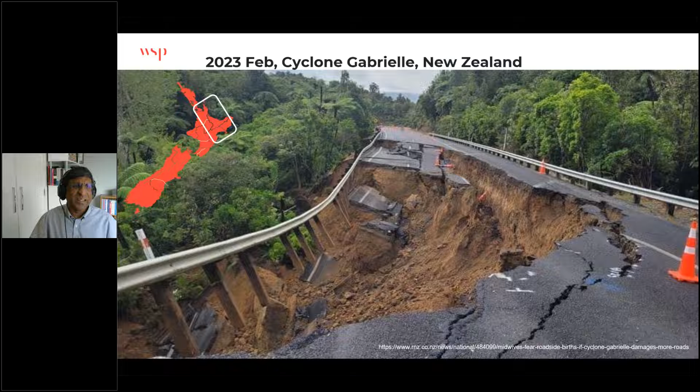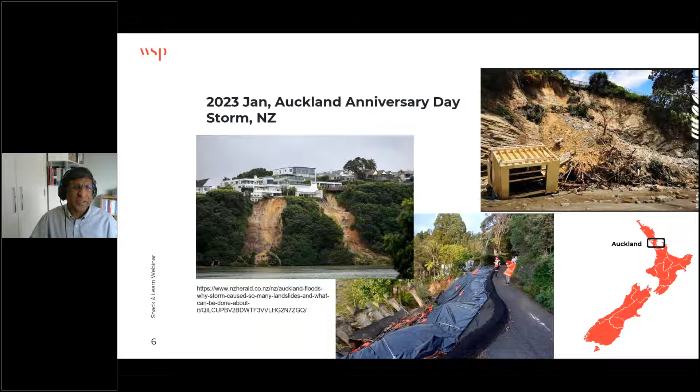So natural hazard impacts. Just this year, in February, we had a large cyclone, Gabrielle, which hit the northeast part of New Zealand, and you can see it there on the left-hand side. It caused a lot of damage to our infrastructure and suffering for our communities. Just a week earlier, in late January, on Auckland Anniversary Day, a big storm hit Auckland, which is our biggest city in New Zealand. Again, that caused a lot of damage to properties, grief for people, and affected our infrastructure. And we are still recovering from these events.

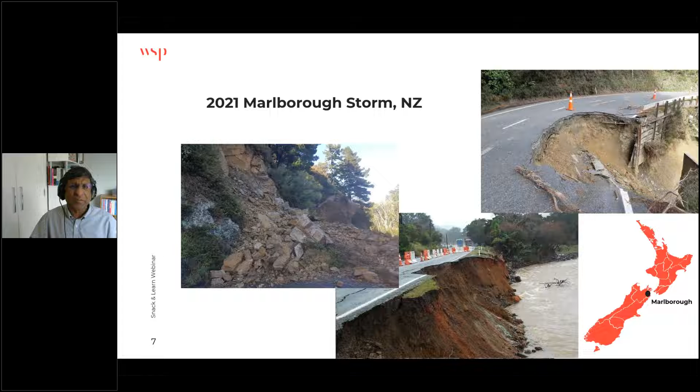And the biggest damage and destruction came from the 2010-2011 Canterbury earthquake sequence. That hit Christchurch on the east coast of the South Island, which is the main city in the South Island. One of the defining things of that earthquake was the amount of liquefaction, lateral spreading, and damage. As you can see in this picture, some new suburbs were completely damaged by these liquefaction events. And you can see the infrastructure was also damaged.

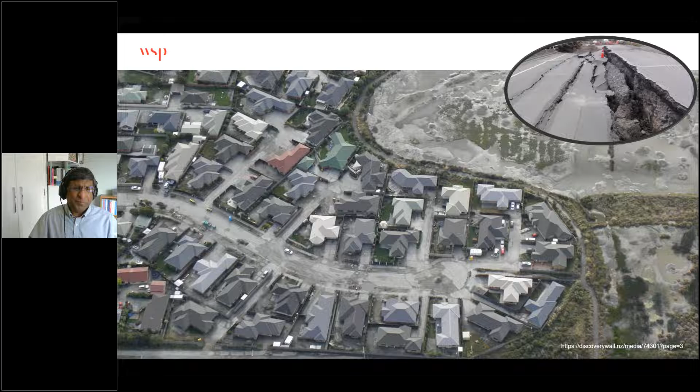Let's now reflect a little bit on climate change. So this is a piece of research done in Europe, looking at the changes in rainfall intensity between 1951 and 2013. A lot of times with climate change, people talk about the increases in temperature and rainfall, and often they talk about the averages. But what that research found is that, yes, there is an increase in the averages, but more importantly, there was a much higher increase in rainfall in the extreme events, say like the 1% severe events or even smaller than that. So this increase in severity of events is very significant.

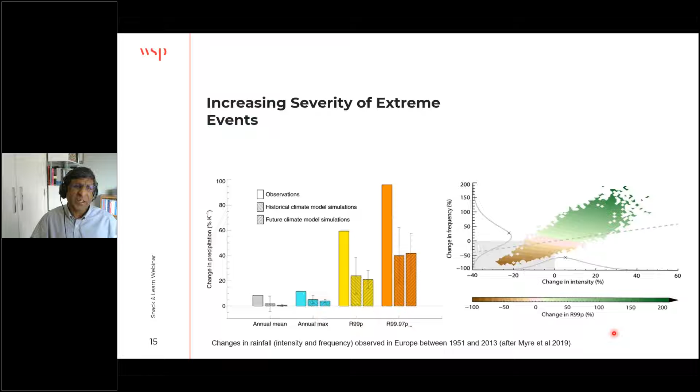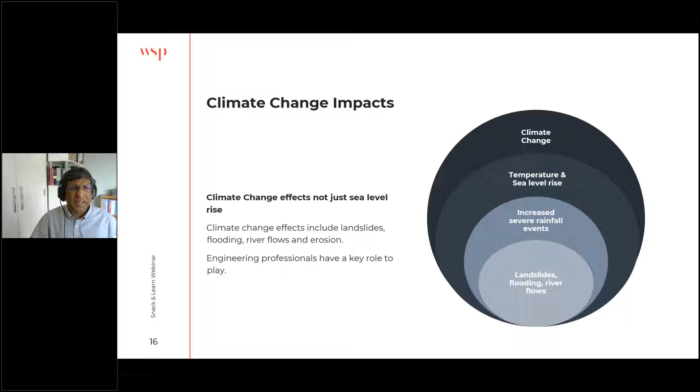And on the right-hand side, you can see this graph indicating that not only is the severity increasing, but the frequency of these severe events is increasing. So that's a key thing we need to keep in mind in our work. So often with climate change, people reflect on sea level rise. The sea level rise happens gradually, but we are already seeing this increased severe rainfall events, storm events leading to landslides, flooding, and river flows, which we as engineering professionals have a key role to play to manage them. So these climate change impacts lead to disrupted communities, large economic losses, the impact on the resilience of our infrastructure, and a large carbon footprint for repeated reconstruction and recovery.

So let's look a little bit about resilience and sustainability and what we mean by that. So living in an era of uncertainty, we need to engineer through extreme earthquake events. Here in New Zealand, we had the new National Seismic Hazard Model published just late last year, which significantly raised the risk from earthquakes. Our knowledge of that risk is now much higher. We also had extreme weather events, as we saw at the beginning, and we need to decarbonize what we do in our sector to reduce emissions and arrest future changes in climate.

So in this engineering, we also need to deal with the fact that increasingly people want to develop hazard-prone land. So how do we manage that through appropriate measures? And while doing all this, we also need to be cognizant of the inflationary era we have, where the cost of engineering work is escalating quite significantly.

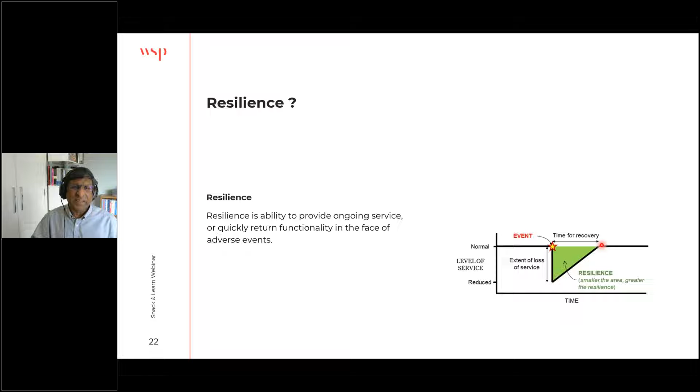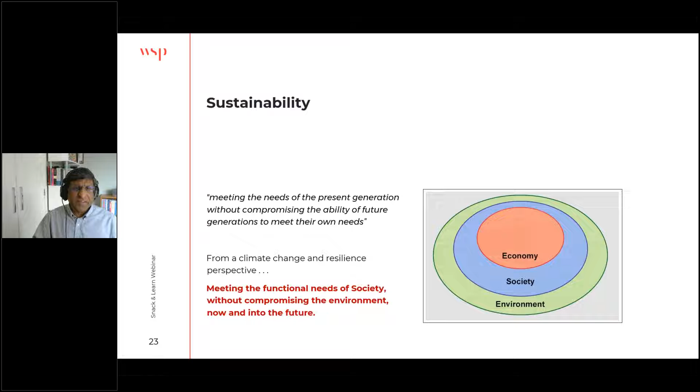So from a sustainability perspective, people often define sustainability as being able to meet the needs of the present generation without compromising the ability of future generations to meet their own needs. So we can reframe that from a climate change and resilience perspective to say meeting the functional needs of society without compromising the environment now and into the future. And you can see the economic, the society and environment are all interrelated. So eventually society is at the heart of everything we do.

So communities need to be able to sustain and thrive in the face of these hazards so that we can have resilient communities. To have resilient communities, we need to ensure the functionality of the built environment, because everything we do in engineering, whether it's a house or an office block or infrastructure like roads or water, everything is to provide a functionality for our communities. To ensure that, we need to make sure that we take into account the resilience of our built environment. And when we design, we need to design keeping in mind resilience is critical to our built environment.

Our current design approaches were developed in places and in stable environments in the years gone by. We are now, particularly in New Zealand, living in shaky isles, so we don't have a stable environment, but also we have climate change and all the uncertainty which we need to deal with. So let's look at how we can deal with this through some case studies. So I'm going to talk through 4 case studies, starting from simple ones to more impactful ones.

So the first case study is a shared path, a cycle and walking path between Ngauranga and Petone along the Wellington harbour front. And one of the key objectives there is to reduce the reliance on vehicles, cars, and therefore reduce greenhouse emissions. So one of the key objectives for this is the resilience to natural hazards and being able to cope with future sea level rise, being next to the sea. So I was engaged at WSP to provide advice on design to enhance resilience and prepare expert evidence on resilience for the Environmental Protection Authority so we can get approval for the project. So I was engaged by the client, New Zealand Transport Agency, or Waka Kotahi as we call it.

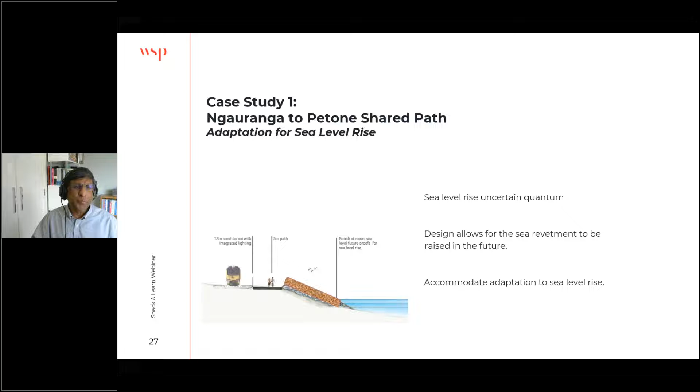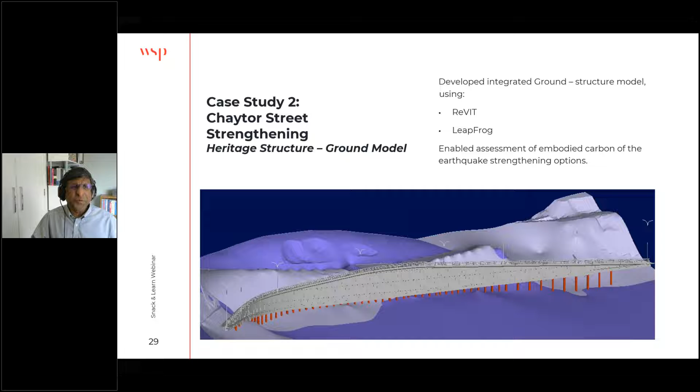So how did we go about it? We started off developing an integrated ground structure model from investigations we did. We did a Revit model to develop the structure and a Leapfrog 3-dimensional ground model to get a model of the ground. And we integrated them to get an integrated model, which we could use to look at the strengthening options of this heritage structure, but also look at the embodied carbon.

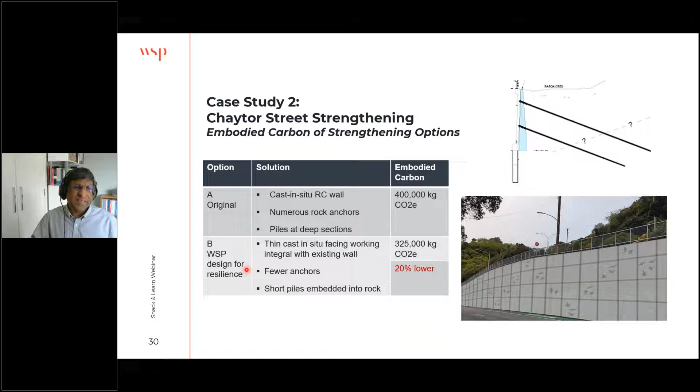So the initial original concept was to have a cast in situ wall in front with numerous rock anchors and piles at some of the deep sections only. And that had an embodied carbon of about 400,000 kilograms. So through our refinement, we were able to use a thinner cast in situ concrete slab, working integral with the existing wall, with fewer anchors, but short piles embedded into rocks. So we had good soil structure interaction. So that meant that we were able to get better resilience and 20% lesser embodied carbon.

So we used a resilience-based design so that we built ductility into the system and into the anchors so it can perform better. And we achieved a significant 20% reduction in embodied carbon and used smart digital engineering to help with the design and help with future asset management.

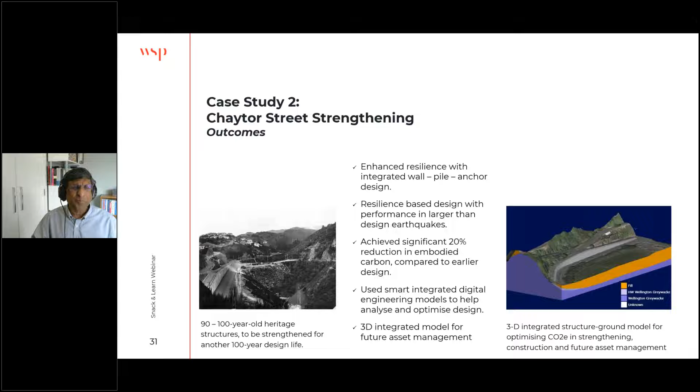The third case study is of the Ferrymead Bridge in Christchurch. So Christchurch is located on the east coast of the South Island, which is the biggest city in the South Island. And this bridge provides access to the eastern suburbs of Christchurch across a river estuary in that area. So earlier there was a 3-span bridge which was damaged beyond repair due to the liquefaction and lateral spreading of the riverbanks in the

2010-2011 Canterbury earthquakes. So the client wanted this to be a first showcase project to demonstrate that we can design for resilience and make Christchurch a more resilient city. So that was the challenge set to us when we were engaged to develop and design a new resilient bridge, and develop specifications, drawings, and contract documents, and also manage the construction in an active seismic environment. So the client was the Christchurch City Council.

So the key challenges we had is highly liquefiable soil. In fact, it had liquefied, so there's no uncertainty there. Severely damaged bridge and new piers that were under construction for the bridge. We had a very variable volcanic pyroclastic flow basement, so there were challenging foundation conditions even below the liquefiable deposits, and numerous underground services in the approaches which we had to deal with in the reconstruction. And also, as I mentioned, we were working in an active seismic environment with aftershocks, so we needed to make sure that it was able to be insured during construction, so we don't get setbacks during the process. And as I mentioned, there was a high societal expectation for completion of this early with good resilience.

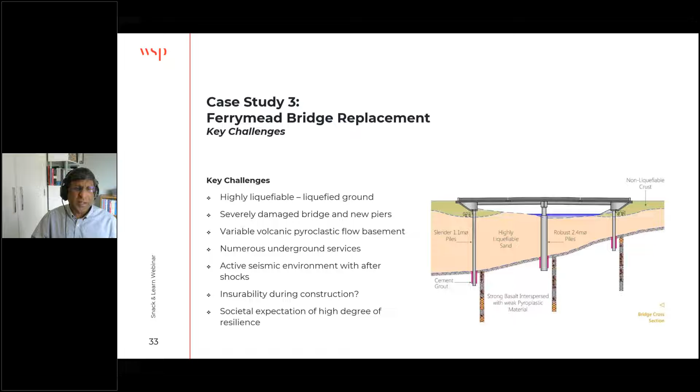So, the existing bridge got damaged due to the piers located at the bottom of the river banks. So we decided to have a two-span bridge. So we located the pier in the middle of the river, where it is not prone to so much lateral spreading loads from the riverbank. And then for the abutment piles, we used slender piles. You might think we got big loads, so why are we using slender piles? Because if you use bigger piles, we'll get bigger loads when you have lateral spreading. So we used slender piles so that the liquefied ground can flow around it, and we take a lot of the lateral load through the robust middle pier.

And then we had short land spans at either end. They act like a fuse. So if you had lateral spreading, you might get some damage to that land span, which you can quickly span over with a steel girder or steel plates, and then repair that quickly to get access. So you can see how we are focusing on not just the functionality, but also the ability to recover quickly. And finally, you might wonder, how do we deal with the foundations? So what we used is a technique called post-grouting using tube-a-manchette techniques so that we could enhance the lateral capacity of these piles in these variable deposits.

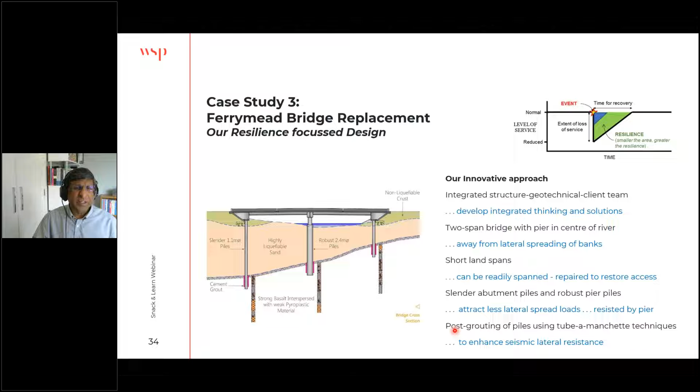So the outcome was a high degree of resilience through this resilience-focused design approach. The piles were supported during construction to prevent damage during aftershocks. And we had reduced cost due to lesser foundations and also the avoidance of ground improvement, which also meant we didn't have to disrupt all the services. And as a result, we also ended up with less embodied carbon because we had less structure in the piers and slender abutment piles, and we avoided the energy-intensive ground improvement. And that led to a successful opening of the resilient bridge. And in the process of this $30-odd million project, we were able to save several million dollars.

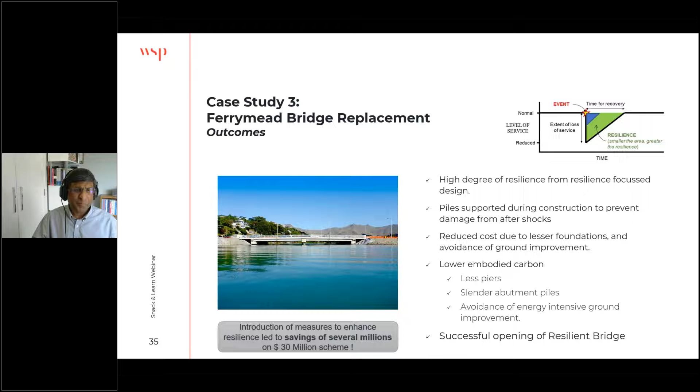So the final case study is about Transmission Gully. Transmission Gully is a major expressway north of Wellington here. It runs through quite rugged terrain with an active fault. The previous concept was very costly, and we needed to gain the buy-in of a large number of stakeholders because it was a regional project crossing a lot of territorial boundaries.

We were engaged to develop a new expressway scheme that is affordable, estimate the cost and prepare a business case for approval, and then also provide evidence to the Board of Inquiry. In my case, I had to present evidence on geotechnical engineering and resilience to natural hazards. The client was the New Zealand Transport Agency, Waka Kotahi.

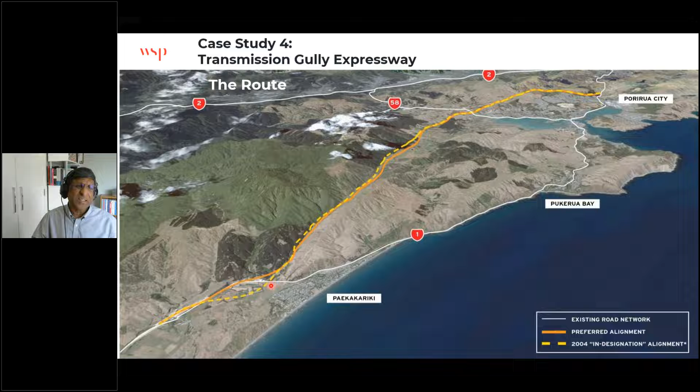This shows a bird's eye view of the project. The original highway, State Highway 1, went through there. The white line went along the coastline with very steep cliffs and the sea on the other side. So there was no opportunity to expand and it had very poor resilience. The alternative was to build this Transmission Gully route to relieve congestion.

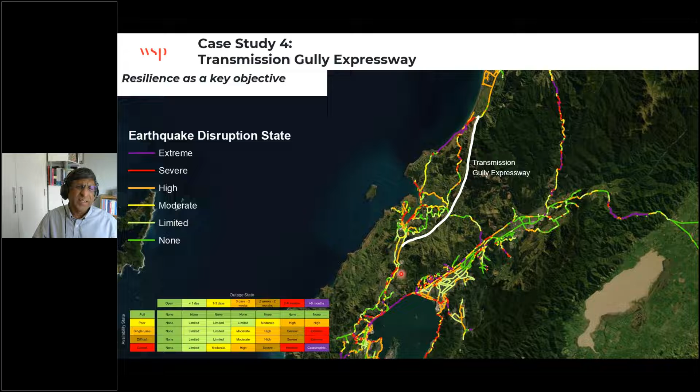So when I looked at starting this project, Transmission Gully had the opportunity to provide significant improvement of resilience of access into Wellington. So we as an organization promoted resilience as a key objective on the project. This is the first time it became a key objective on a major transport project, and this enabled us to bring integrated focus on resilience with our team.

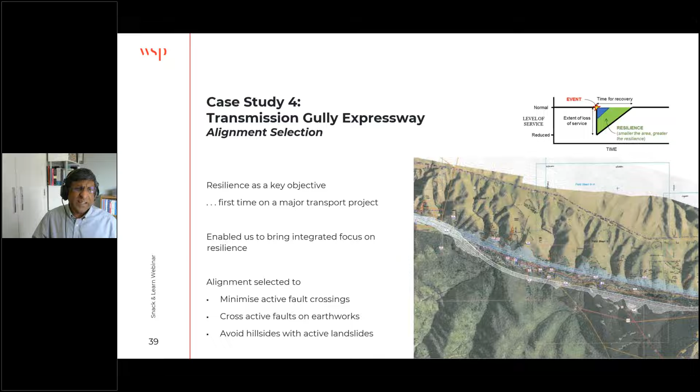One of the key improvements was to cross this active fault on a gravel fill embankment instead of viaducts. Why? Because if a viaduct or bridge crosses a fault, that kind of displacement can't be tolerated, and therefore the bridge would be non-functional, and it will take a very long time to design and replace the bridge. Whereas if you had an embankment, we could quickly use some earth-moving machinery to ramp across the fault rupture and restore quick access, and then repair that quickly as well. So we went with a more nature-based solution.

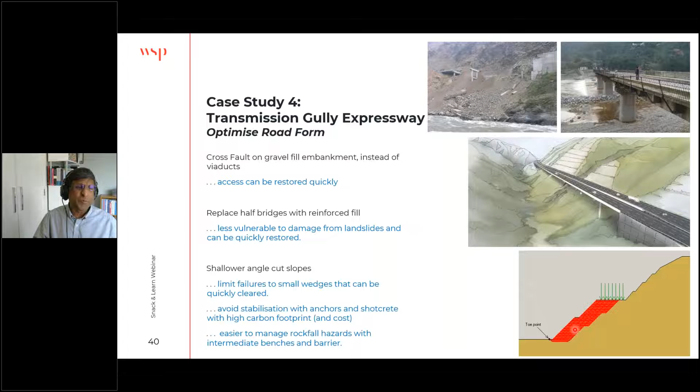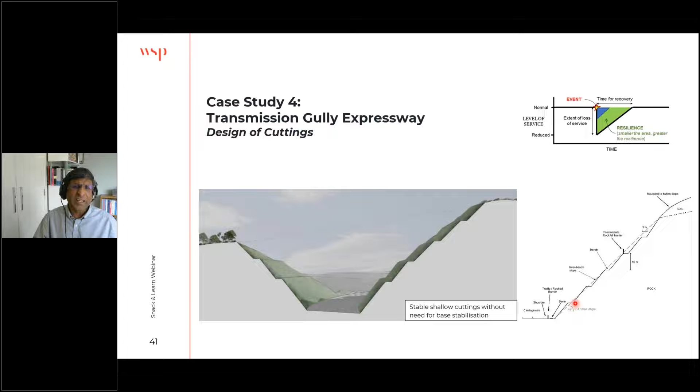We also looked at the cut slopes, and we adopted generally flatter cut slopes. We had cut slopes of about 45 degrees rather than steeper 60 degrees. Why? Because it will be more nature-based, so we have less need for shotcrete and anchors, which are costly but also carbon intensive. This enabled us to accept small wedge failures but avoid large failures. Therefore, you can see from a resilience perspective, we made it into a little blue triangle. So we'll have small rock falls and wedge failures, but not large failures, which affect functionality.

So what was the outcome? We were able to bring future focus to this project, achieve a high degree of resilience, use more nature-based solutions, and end up with a lower carbon footprint. And incidentally, we also achieved a $300 million saving on this $1 billion project. On that basis, the project got wide stakeholder support, and the project was approved by the Board of Inquiry based on the expert evidence we were able to present, and the project was able to proceed.

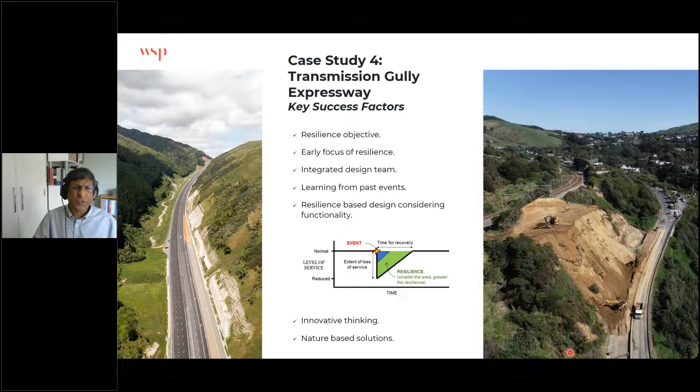So the key drivers from here are the resilience objective, the early focus on resilience, and the integrated design team we had. And the focus on resilience-based design was critical to get innovative thinking and accommodate nature-based solutions. On the right-hand side, you can see the pre-existing highway I showed, the white line, last year was closed by landslides for a number of weeks, whereas on the left-hand side, you can see the Transmission Gully Expressway was open and was able to provide access. And you can see even in this modest storm event, how resilience was enhanced.

So let's look at some key concepts. In terms of climate change, it requires a twin response. We need to address the impacts which we are facing so that we can improve resilience. We also need to adapt to changes which will happen progressively, like sea level rise. Also, we need to arrest future changes by decarbonizing what we do.

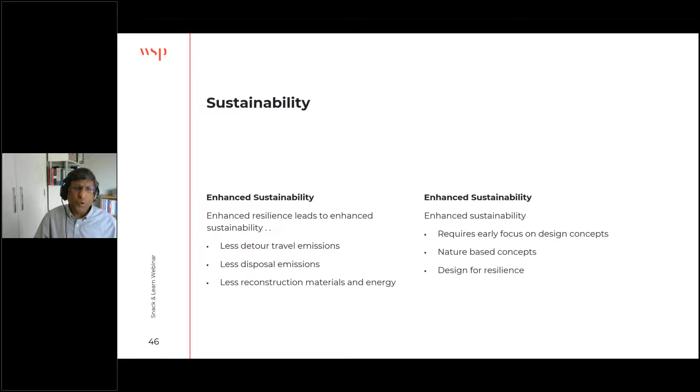The second thing is sustainability. If you had poor resilience, you would have larger detours. If it's a road, you'll have large disposal costs and you'll have large reconstruction. So by enhancing resilience, we can reduce all that. But achieving this sustainability requires early focus on the design concepts, using more nature-based concepts and designing for resilience.

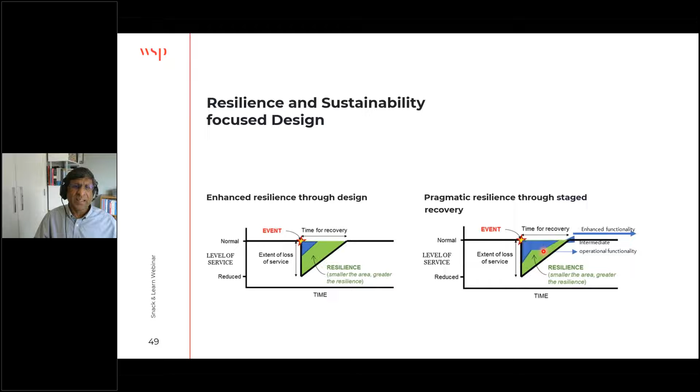So to do that, a resilience-based design is important. So we can focus on functionality and recovery, which is important. Sometimes we can recover in one step. Sometimes we might have a staged recovery, initial partial access or partial functionality, and then it takes a bit more time to get full functionality. To achieve that, we need an integrated focus on sustainability and an early focus. So that enables us to focus on sites, alignments, and structural forms. And we need to work together as an integrated team.

The final thing is resilience does not need to cost more. If we have a mental block that tells us that resilience and sustainability cost more, we can't make progress. We need a paradigm shift in our thinking that we can achieve resilience without necessarily costing more. So we need that shift in our thinking.

So to conclude, we are living in an era of uncertainty. We have climate change effects, earthquakes, and the need for decarbonization. We as engineering professionals need a shift in our approach. We need to work together as an integrated team, and we need to focus on designing for resilience and use nature-based solutions wherever possible and bring this early focus on resilience and sustainability. That way, resilience and sustainability does not necessarily need to cost more.